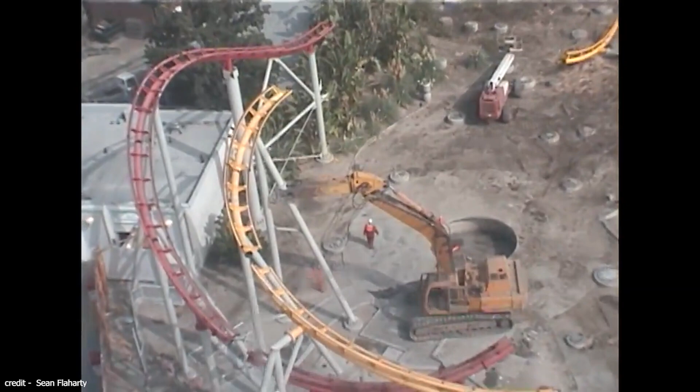As a supplier of amusement rides, we understand the concerns of our clients, because in many cases, we are the client.

By 1986, the fanciful sets and breakaway walls of wacky soapbox races had been worn down by the elements and removed. What remained was an Arrow steeplechase with funky, wood-planked carts sporting used pie tins for grills. Underneath the cars, Arrow's steel track was wearing out, and in time would require a complete replacement.

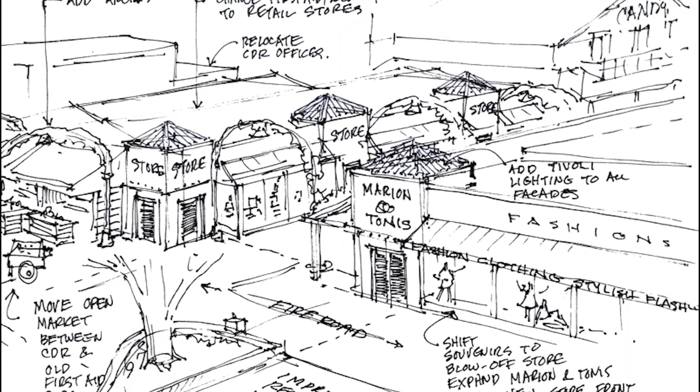That same year, the park's CEO, Terry Van Gorder, made proclamations about the future of Knott's Berry Farm and the Roaring Twenties airfield that the racers called home. Terry boasted of a $30 million 5-year plan that would alter the meaning of Knott's position as the California park. The plan called for a re-theming of the Roaring Twenties to appeal to visitors from the Pacific Rim.

Terry's vision included 2 new major attractions, one being a super roller coaster.

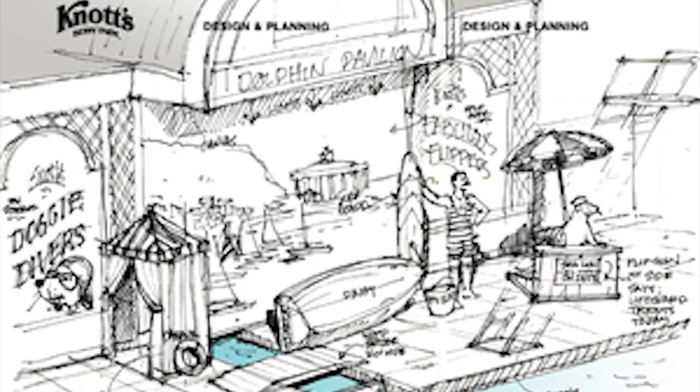2 months before Van Gorder rolled out the international strategy, the design and planning team delivered Pacific Pavilion, an 1,100-seat amphitheater with a pool for dolphins, a sea lion, and diving doggies. It replaced the Starlight Pavilion with a sculpted, bizarre exterior inspired by the World's Fair architecture of the turn of the last century.

Just a quick Lindy hop away from the Pacific Pavilion, the Roaring Twenties would see its first undoing when Knott's corkscrew was replaced with Boomerang. The station and setting of the Vekoma shuttle lacked the Pacific Rim aesthetic Terry promised 4 years earlier.

Meanwhile, 35 miles north of Cincinnati, Ohio, a famed Japanese coaster maker was opening a branch office in the Americas.

Togo has been the leading Japanese manufacturer of amusement rides since its establishment in 1935. The company owns and operates Hanayashiki Amusement Park and manages operations in 15 other parks across the country. Togo began its export of excitement in 1972.

Realizing the need to better service our clients in North America, South America, and Europe, a subsidiary was established in May of 1991. Located in Middletown, Ohio, Togo International Incorporated manufactures Togo products in the United States.

As a supplier of amusement rides, we understand the concerns of our clients, because in many cases, we are the client.

Togo Japan was on the rise, having invented the stand-up coaster in 1982, the Heartline coaster in 1984, and the Hypercoaster in 1988. With the aim of tapping the growing US market, they incorporated a subsidiary in 1991 and named it Togo International Inc.

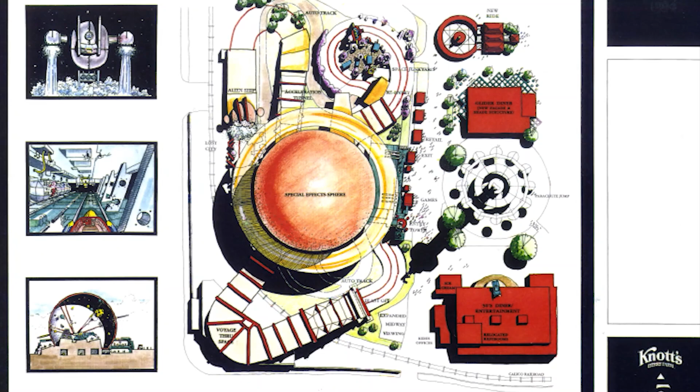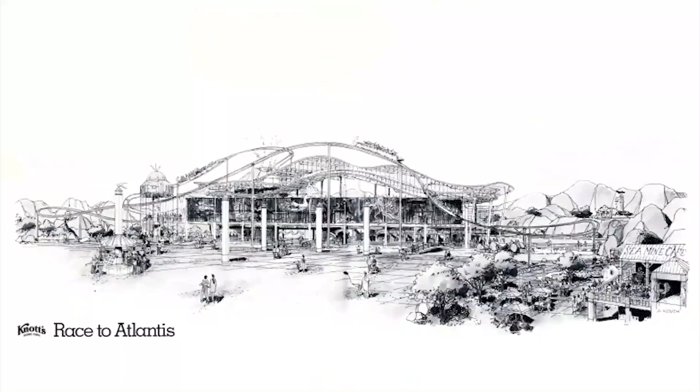Another concept was dubbed Speed Coaster, which would have divided the airfield into two precincts. A third idea was Race to Atlantis, combining the thrill of competing coasters with a detailed exploration of the briny depths. It was conjured from a winning combination of intriguing history, immersion, and unique ride systems. The nearby eatery would even be set in a sea mine for good measure.

Race to Atlantis was received with sticker shock. Though too expensive to pursue, its moorings would bubble up as a similar theme, one as Californian as the Golden Poppy.

Announced in February of 1996, the Boardwalk would transform the entire Roaring Twenties airfield into a land celebrating the Southland's fabled beach culture. The first major addition in this mold was Hammerhead, an 82-foot tall Rotoshake festooned with marine life. Impressive and intense, the ride dove right into the beach theme with dramatic effect.

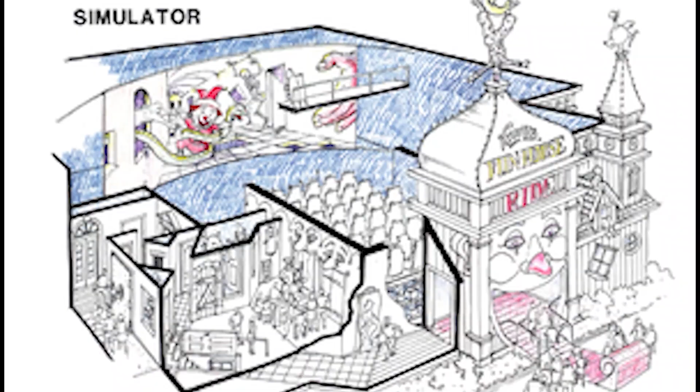Other Boardwalk options, not so much. The Boardwalk's aesthetic approach wasn't meant to evoke the seaside getaways of the past. Instead, the intent was to spotlight a new generation of ocean-oriented attractions. Terry promised the Boardwalk would introduce guests to the best, most exciting amusement attractions on Earth.

Six months after Hammerhead's successful opening, Knott's revealed the wacky soapbox racer's replacement. In keeping with the tradition established by the motorcycle chase, the new attraction would be a set of racing coasters. Planned on a $9 million budget, the side-by-side tracks would feature vertical loops on a tight course.

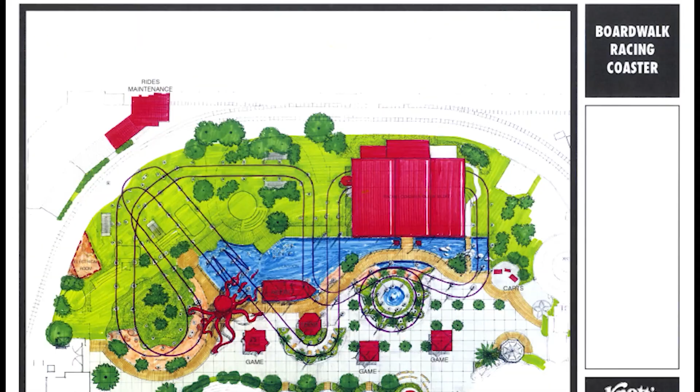Most importantly, the attraction would include a coastal landscape expressing the most youthful and vigorous aspect of California beach culture: surfing. Tom Sutton was the principal designer of the new attraction's station and general layout. Knott's design and planning team, under Robin Hall, handled the rest, including vehicle designs to emulate the surfing motif. Tracy Cavola and John Barr created graphics that captured the spirit of mid-90s teen culture.

The ride was named Windjammer Surf Racers.

Wonderful. It did exactly the same thing it did the first time. Dude, it was awesome. Started going real slow, got to the top, dropped down, then it started spinning. I was scared out of my wits, man. Number one ride in the park. They'll never get a better one.

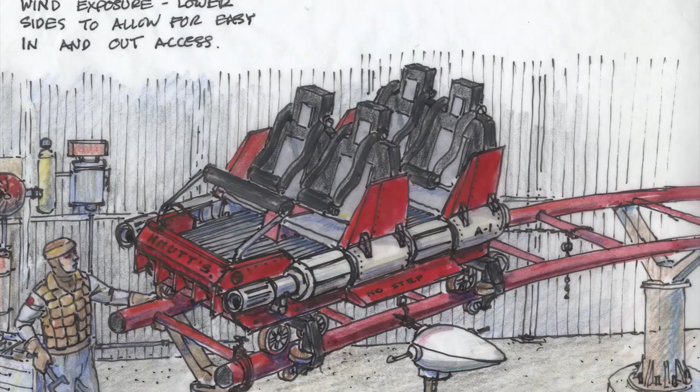Creation of Windjammer's ride system was put out to bid. Unlike Zoom, Corkscrew, or the Boomerang, the surf racers were a custom layout that required engineering and manufacture from scratch. Togo International won the bid.

At that time, Togo's team in Ohio were busy at work on a project for the New York Hotel and Casino in Las Vegas. Both their Nevada and California orders were slated to open in the first quarter of 1997. Windjammer's props and effects were built with the help of general contractor Gordon & Williams.

A lagoon formed under the ride's track, finally providing the Boardwalk a beach. In a few short months, sandy dunes, palm trees, a lifeguard tower, and waves of twisted steel transported guests to an energetic shore, tying the ocean feel back to its anchor at the Pacific Pavilion.

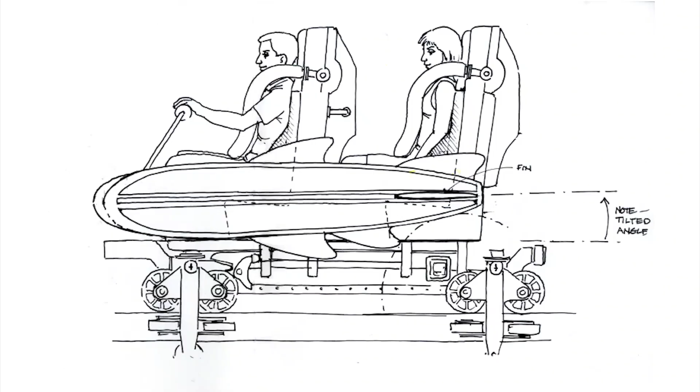What materialized from Sutton's concept was a coaster similar to Togo's Looping Mouse, a variant of the company mainstay first installed at Tobu Zoo Park in 1981. Windjammer's cars would be similar to Wild Mouse's cars in stature, with a relatively high seat profile. Like most Wild Mouse coasters, Windjammer coupled the cars into trains.

Over-the-shoulder restraints were added, just like Viper at Great Adventure and the Manhattan Express in Las Vegas. Knott's marketing was giddy about Windjammer. As the opening day approached, they publicized the coaster as the nation's first major outdoor dual-track steel racing coaster.

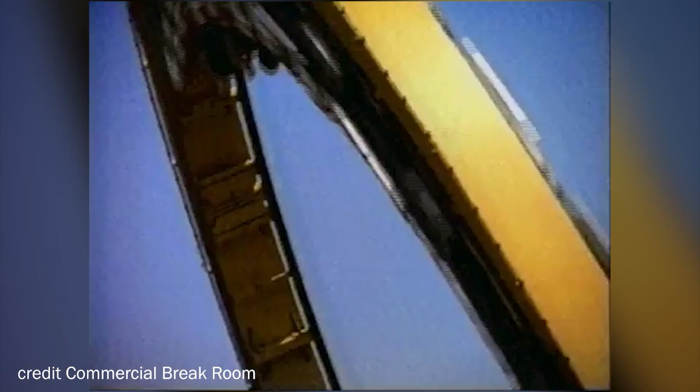First, Knott's brought you Montezooma's Revenge, Jaguar, and Boomerang. Now, Knott's introduces a new side-by-side racing coaster: Windjammer.

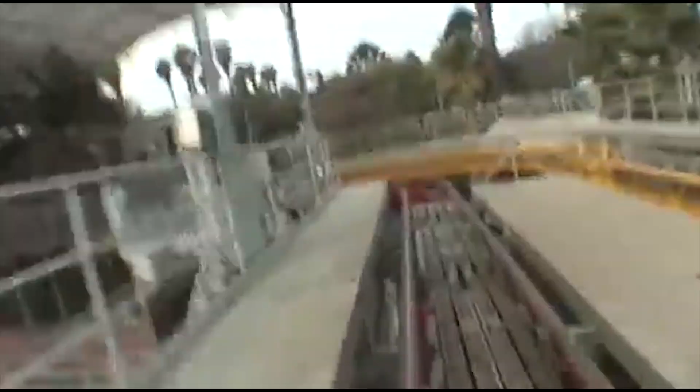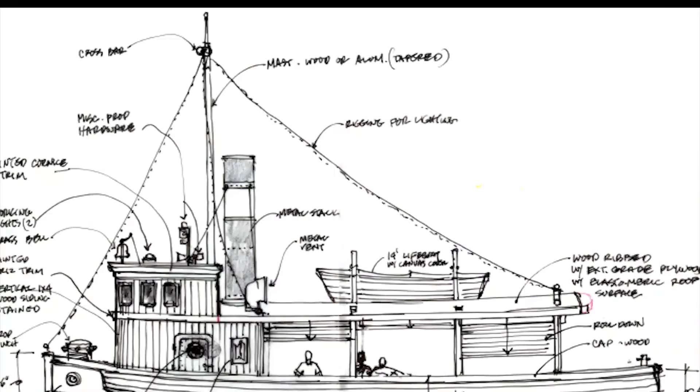Of the more interesting additions to Windjammer's corner of the boardwalk was the on-ride photo booth. Originally, designer Robin Hall wanted to place a gift shop in an old fishing boat or tug. However, the merchandise department resisted, preferring a facility with a boxier shape. After several drawings and fit attempts, a compromise was reached, and lucky riders found themselves purchasing their special memories from the side of a tugboat.

Windjammer Surf Racers washed in a wave of coastal cool and completed the boardwalk. Unfortunately, the good vibes wouldn't last long.

In the first week of its run, Windjammer showed signs of serious problems. For starters, riders complained of very rough rides. Most guests noted that the shoulder restraints lacked sufficient padding, leading to sore necks and migraines.

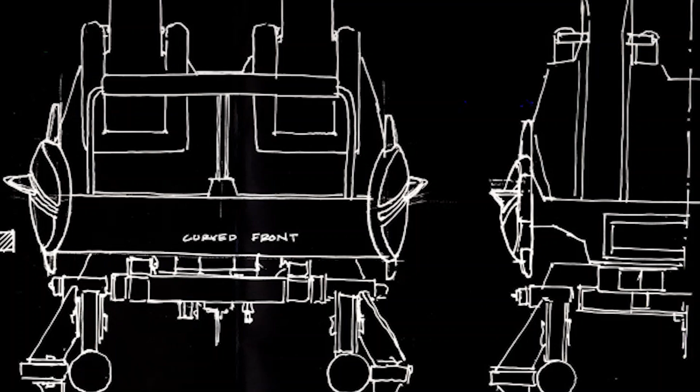The park hired inspectors and found structural issues with their new signature attraction. They determined that sections of track were misaligned. They found the metal mainframes of the trains were already fatigued and showing wrinkles. And they discovered the safety restraints were not only uncomfortable, they were defective.

And then there was the most serious issue of all. In the midsection of the track, trains showed a tendency to valley or stall, leaving riders stranded and forcing the attraction to shut down. Inspectors concluded the most exasperating of reasons: the wind.

Knott's had no other choice than to close the surf racers during breezy conditions, an embarrassing coincidence for a ride with the word wind in the title.

As the farm spent thousands upon thousands of dollars to fix their spotlight offering, word was spreading of problems with the manufacturer's other recent coaster, the Hypercoaster out in Las Vegas. To Knott's, the picture had become clear.

Togo's team in Ohio wasn't up for the job.

As the farm made fixes to it, Windjammer was reduced to a state of barely operating. Then, in December of 1997, Cedar Fair took control of Knott's Berry Farm for the price of $245 million.

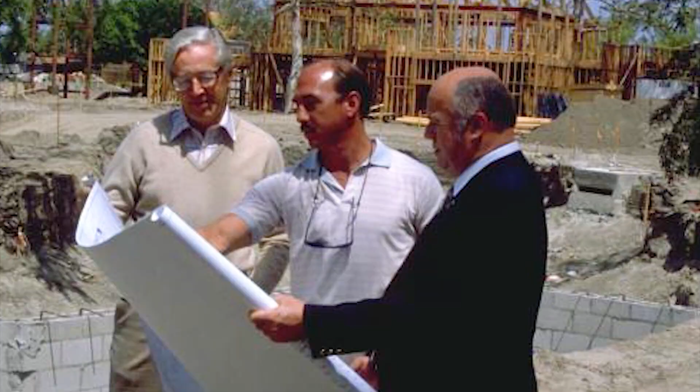Terry Van Gorder was replaced as GM by Jack Falfas, a longtime Cedar veteran and protege of Cedar CEO Dick Kinzel.

You know, mom and dad can ride together and enjoy the ride, or you can take Johnny and Mary, the children. But let's not forget about Grandma and Grandpa, who's very important in the family, and it kind of immerses everybody. It's thrilling, it's exciting, but it's not so steep and such an intense high-speed drop that it rules anybody out.

Earlier in the year, Cedar Point debuted Mantis, the tallest, fastest, and steepest stand-up roller coaster at the time, a perfect example of the formula that Falfas had absorbed in his 21 years of experience with Cedar management.

Jack sized up Windjammer Surf Racers and concluded it was not up to his expectations mechanically. Within his first year as GM, Windjammer ceased its racing feature.

Only one track would operate at a time until 1999, when the yellow track was rendered non-functional and the red track was left to handle all riders. Even after portions of the red track were smoothed out, it didn't operate if the winds were moderate.

On March 4, 2000, Knott's Berry Farm hosted a promotion dubbed Coaster Enthusiast Day. Enthusiasts could look at, but not ride, Windjammer.

Jack Falfas spoke to the collected enthusiasts about the situation with the surf racers. He was blunt, stating, 'Windjammer is not a ride I want running in the park.' He said negotiations with Togo were ongoing, and in his estimation, the site's potential was being hampered by Windjammer's presence.

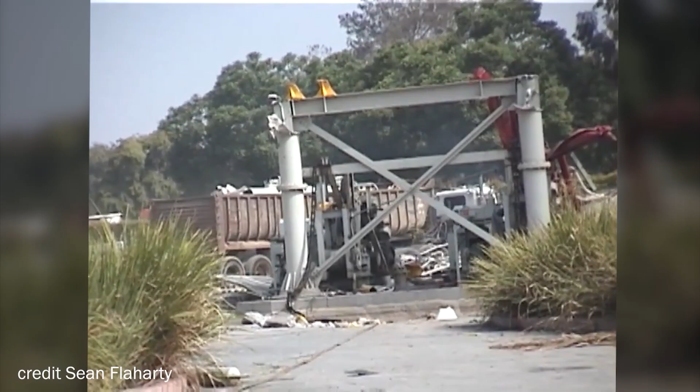Knott's removed the lagoon, all references to surfing, and anything oceanic for a replacement that factored in neither the racing legacy of the site nor the beach culture of Boardwalk.

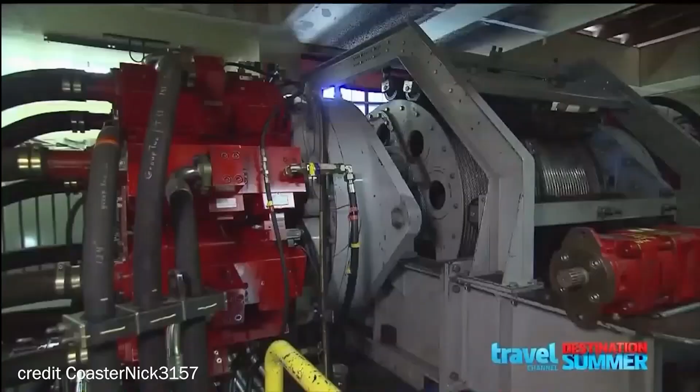This coaster is known for that sensation of pure speed and that visual climbing straight into the sky, that push you back in the seat, hard-pounding acceleration. That's what Xcelerator's all about. In June of 2002, with the Windjammer lawsuit still not scheduled for trial, Knott's Berry Farm opened Xcelerator, a 205-foot tall, hydraulic launch coaster with a 1950s theme.

Unlike the surf racers, this coaster could stand up to the wind. Rain, on the other hand?

Finally, in September of 2003, the lawsuit went to trial. What took 5 weeks for lawyers to present required only 5 hours for the jury to resolve. Togo was off the hook. Knott's attorneys fumed that jurors had failed to examine over 100 pieces of evidence.

Lawyers representing Togo Japan broke the ride maker's silence, arguing that Knott's only used the suit as a money grab to pay for a bigger, badder, and faster attraction.

That bigger, badder, and faster attraction proved itself as the right move. Its kitschy mid-century palette would supplement the rest of the land's aesthetic a decade later, although most of the original boardwalk had already washed away.

Pacific Pavilion closed in 1998, replaced by the unfortunately named Perilous Plunge. Itself replaced in 2013 by Coast Rider.

Hammerhead was removed in 2003 due to high repair and maintenance costs. Hammerhead's replacement, a Huss Topspin named Riptide, lasted 12 years, then got the boot, along with Boomerang, to make room for a surf-inspired Gerstlauer Custom Infinity coaster.

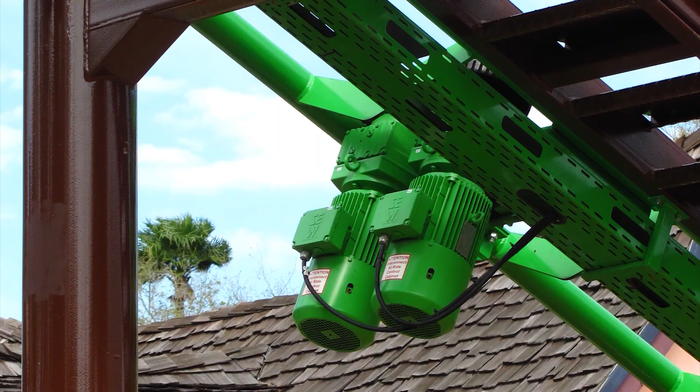Windjammer surf racers arrived to high expectations. However, it was never given a chance to prove itself. It might have survived if simpler fixes were considered, but the petite looper didn't fit Cedar Fair's ideal and had to go. On its way out, Windjammer took with it the hopes of the original boardwalk.

It left no remnants, no broken hearts. It simply dissipated, like the marine layer under the California sun.